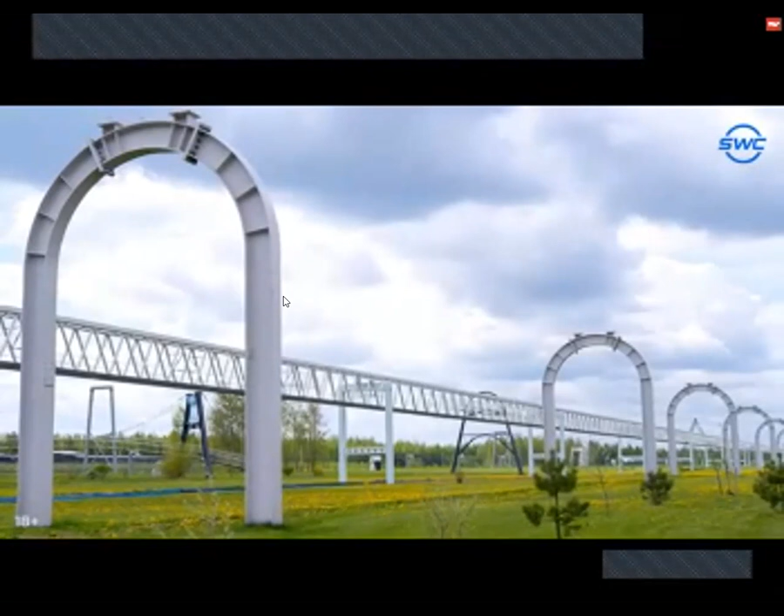Lines 6 and 7 are being designed in the Eco-Techno Park. These are UST transport and infrastructure solutions for heavy rolling stock weighing up to 60 tons. Static and dynamic calculations are now being carried out, and the main parts of the complex are in the process of being constructed. The semi-flexible heavy-duty rail string flyover will make it possible to test suspended unimobiles as well as to practice design solutions for the track structure.

uSky Transport was part of the exhibition at the Abu Dhabi National Exhibition Center as part of Mobility Live ME 2023. Visitors and participants at the event were introduced to UST technology, which is designed for passenger transport. The company's booth aroused great interest among the guests, which is hardly surprising. Mobility has managed to become a current trend in the development of transport infrastructure.

An important event for the development of the Skyworld community took place on the 25th of May with a presentation of the Premium Club. This is a private club whose members enjoy additional meaningful privileges and benefits. It connects partners around the world and opens up access to exclusive offers and private events. Premium Club residents will now be able to achieve their goals and realize their plans much faster.

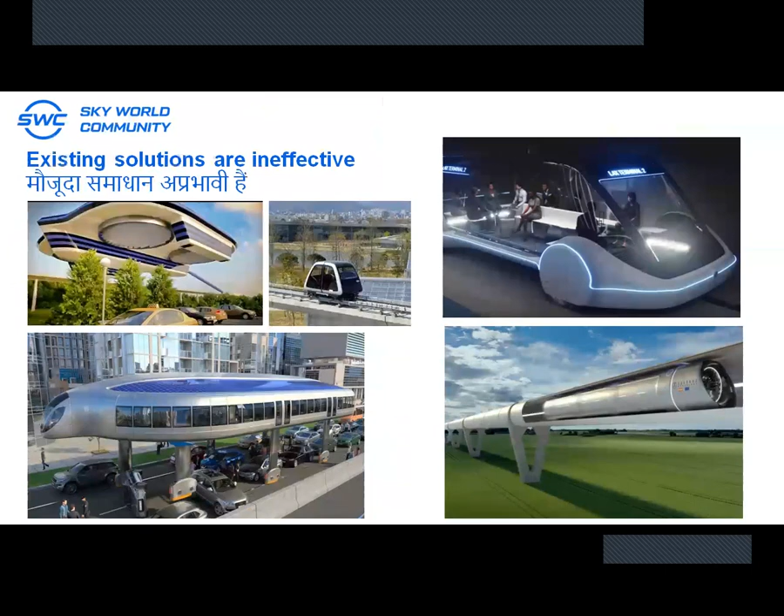And we know that currently we don't have any existing or effective solution for all this problem, right? So we have to seek the solution. And now when it is in front of our eyes, we should not resist ourselves from becoming a contributor in that.

What is our action? Just to be a supporter of that. We need to contribute in that, and this could give us the best solution to all the problems we are facing every day. It's not a problem of 1 minute, 2 minutes, that after 15 days goes away. No, it's an everyday problem we have, right?

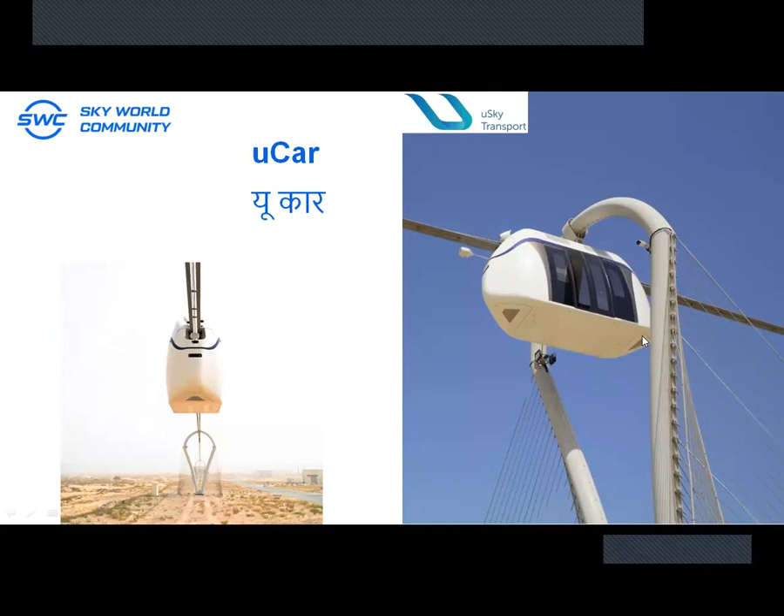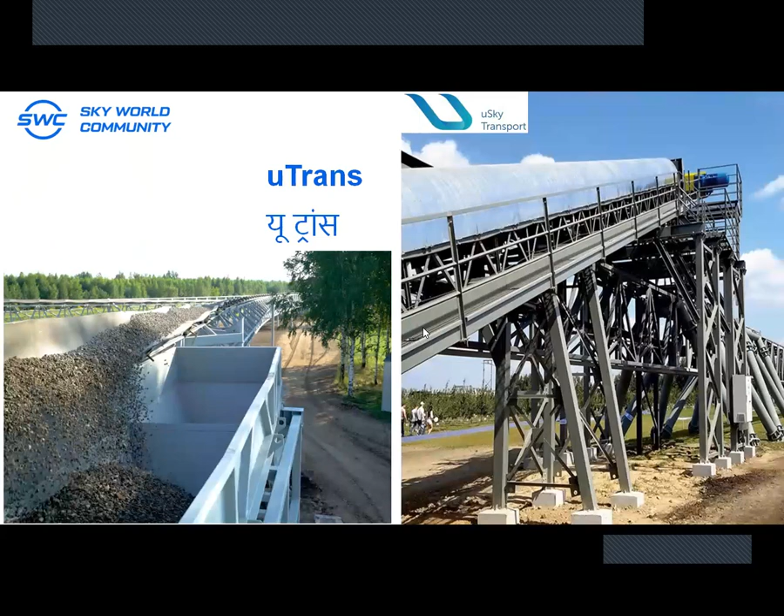And that's U-Trans, the continuous cargo conveyor type system. It's an optimal solution for mining, loading or reloading terminals, and seaport terminals. It allows fast transportation of significant volumes of bulk material, something that can be transported very easily. Here you can see the functional picture of it - it's mainly used for cargo, loose cargo, and mining purposes. You can see that they are real, they are certified.

And this is the uCont, where every country needs it and it is the best solution for cargo. And here we can see it - these are the pictures from the certification, when the certification was going on at the test center, this container. And the transport net cost is from $1 per 100-ton kilometer.

It's great, it's very great. You can see it's on a track, and it's already certified and it's real. These are pictures of the engineers who were there, very happy to have a picture in front of the camera with this vehicle because it got the certification.

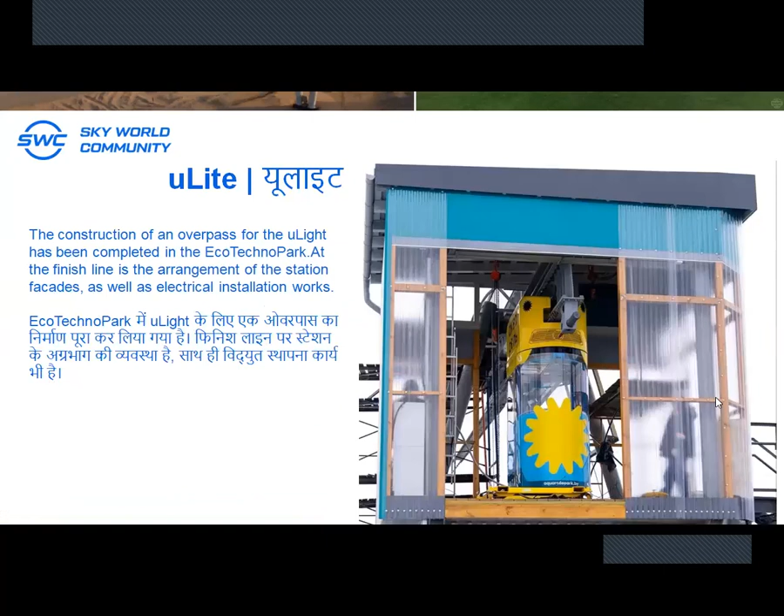And here is the U-Light - we have one more vehicle from Unitsky String Technology. The construction of an overpass for the U-Light has been completed in the Eco Techno Park. At the finish line is the arrangement of the station facades as well as electrical installation works.

And seaport - our CEO thought about, what about the seaport? That's also a big problem of transportation, right? The main advantage of using the UST cargo transportation system in the seaport is for delivery of loose, liquid, and break bulk cargo for distances of 5 to 10 kilometers, more or less.

And how does the UST technology work? How does it work? We will go deeper into the technology a little bit. We will come to know how it is made up, and why it is so fast, so innovative, so unique. So be with me for that.

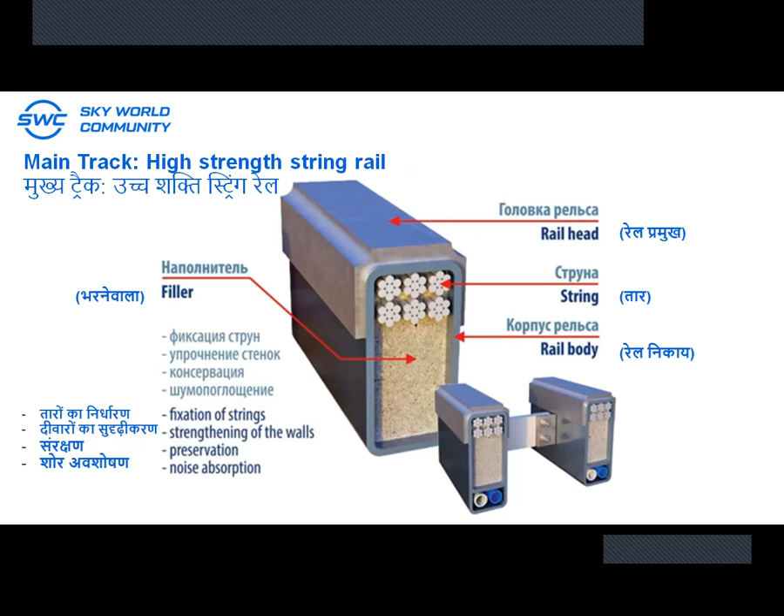You can see how strong it is, how much load it can lift, right? All these strings are wrapped around each other, which we are seeing here. These are not something else - they are strings wrapped around each other to make it more strong, like we do with a rope, right?

What makes it, when we say it's 5 times smoother, 3 times stronger, how? We all know about the normal bridge - it is anchor A and anchor B, right? We know about this bridge. But this technology uses slant anchors, which give it extra support, making it more stronger and more smoother. So this is a high strength string rail.

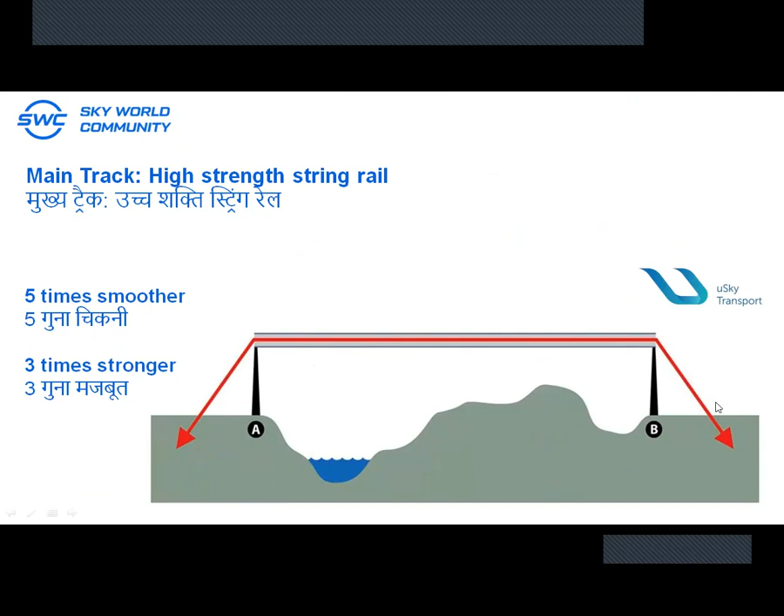And here it comes in 3 variants. First is the flexible one, for hilly areas and remote areas. Then is the rigid one, it's on a double track, you can see. The third one is the semi-rigid, for integrated cities to transport buses, metros, and etc.

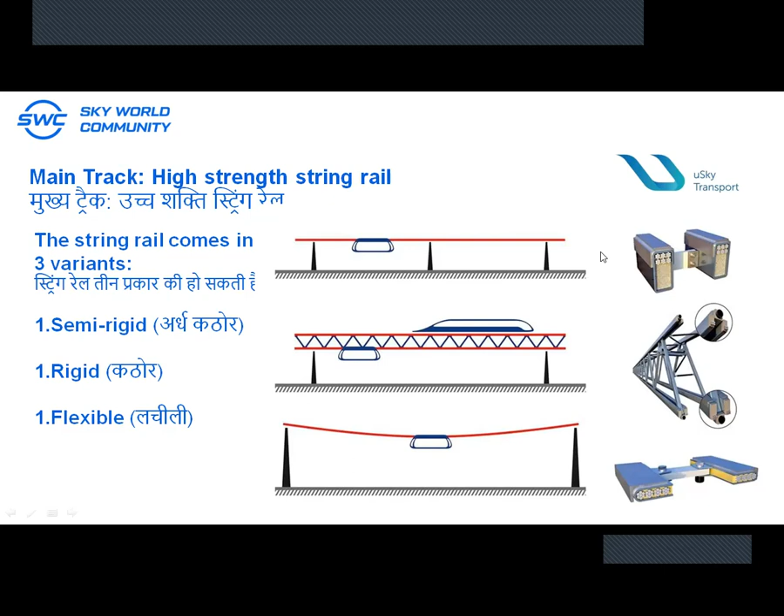Now we talk about the USky engine. It's the heart of the technology. What's special about it? The USky engine can run on natural gas, methane, hydrogen, and other environmentally friendly fuels.

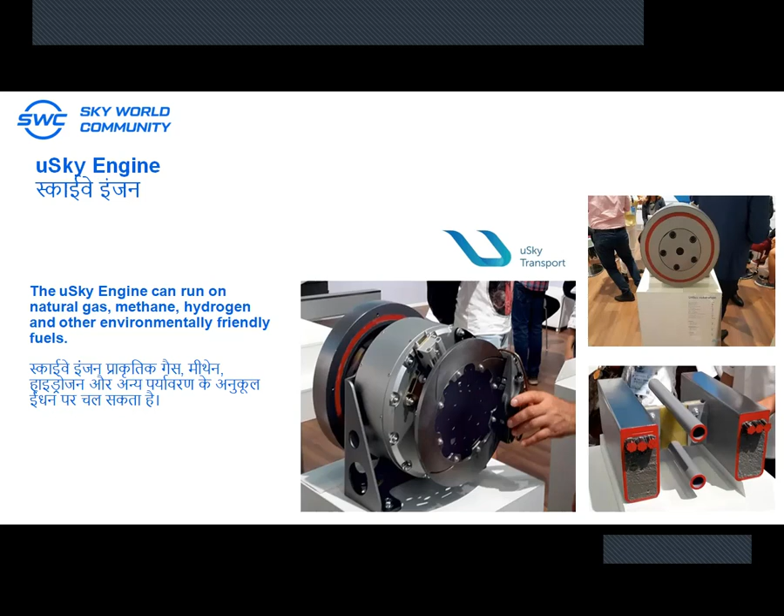It is made of some very special metal that when it's on track, there is no friction. When there is no friction, what does it mean? It means there would not be any sound, and it will have a resistance to wind. When it has a resistance to wind, what will be the result? No pollution, no sound pollution, no air pollution, and we can save fuel also. This is a natural resource, a very limited natural resource we have. We should save it, and we can save it.

So now we will come to the string transport advantages. First of all, aerodynamics plays a pivotal role. What is aerodynamics? It's defined in the unit of Cx. The aerodynamics of the string transport is multiple times higher than that of a car.

So for the car it is 0.4, and for the USky it is 0.06. What does it mean? It means it has more resistance to wind, and when it is on the track, there will be no sound, very less friction. If there is very less friction, less sound will be there, and more fuel conservation will be there. We need to conserve the limited natural resources of fuel.

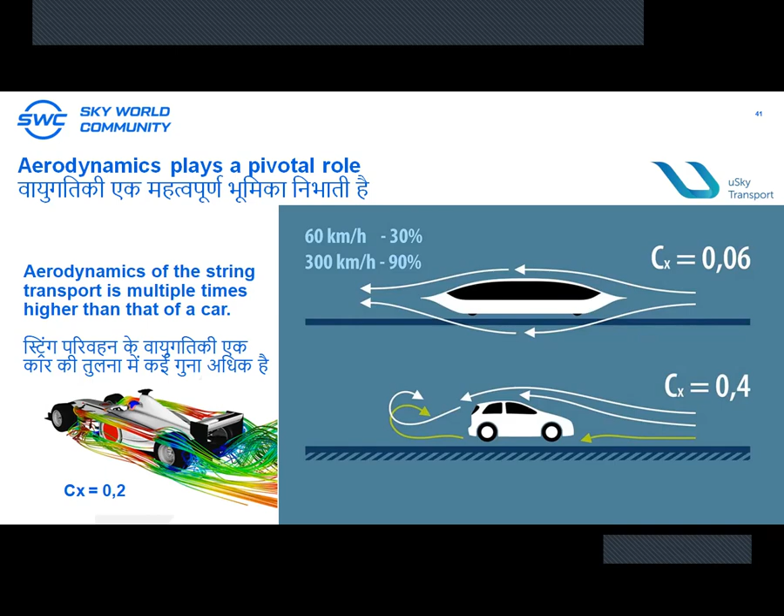Due to that, one USky high-speed transport can save up to 880 tons of fuel each year - each year we can save this natural resource. So it's good for environment, atmosphere, in every manner. If you think about natural resources, if you think about air pollution, it's the best solution. I don't think we need to think twice about that. We need to support it. We must support it.